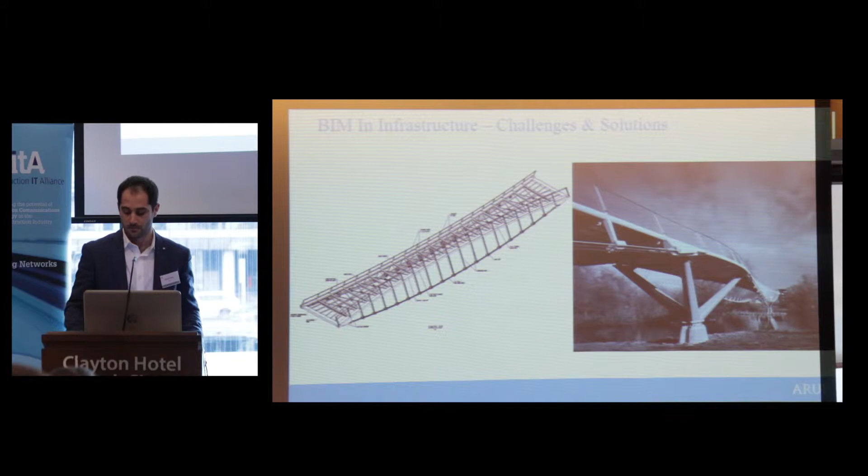We have our silos, and I think it's important that we understand that these have to come down, because otherwise it just does not work. So therein lies the challenge. We really have been modelling 3D since the 80s, so you could say, in some shape or form, we've been doing BIM since the 80s. But it's important to note that BIM is not just a 3D model.

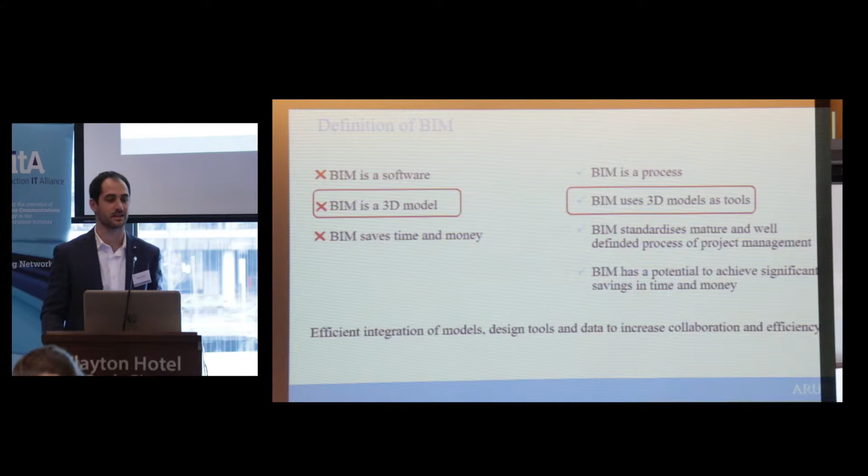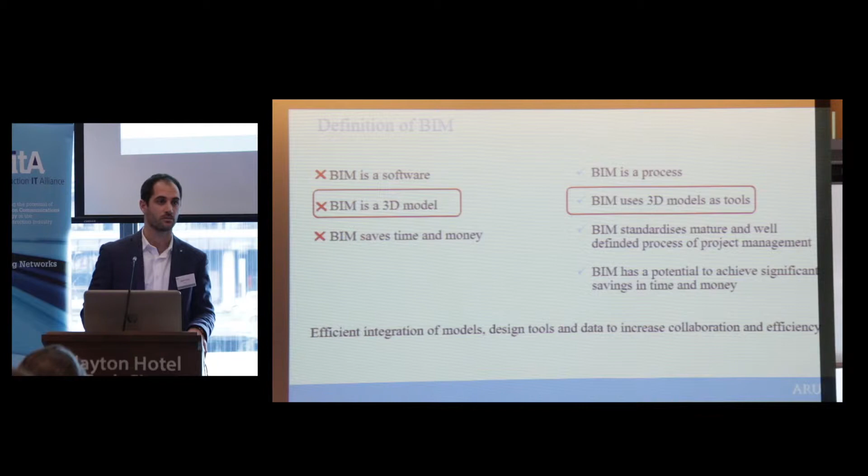Ted and Alan said it, that it really is using 3D models as a suite of tools to increase collaboration. And we like to see it as basically the efficient integration of models and design tools to increase collaboration and efficiencies, and that's key. We don't want to be stuck in our silos as a rail engineer producing a 3D model that is no good to anyone but myself.

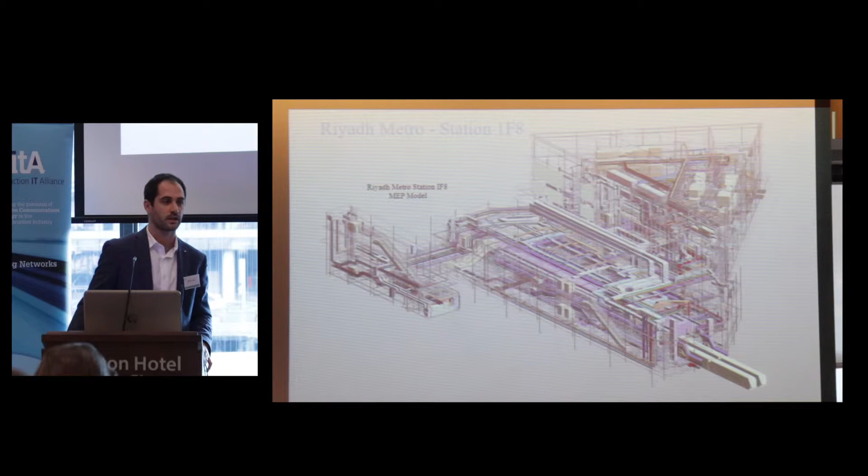In the world of buildings, in recent years, building engineering has really taken a giant leap forward, and it really has become the status quo. In Europe, every buildings engineering project is BIM proficient. Every project has to adopt BIM. Whereas when you look at infrastructure, it's years behind, and we are trying to ask ourselves, why is that?

The image you see here is a model. I'm going to present a few projects. A lot of them are international, but they're all done across the river. So this is Riyadh Metro Station IF8, which was done out of our Cork office: the structures, mechanical, electrical, public health, with the architecture being done in Toronto.

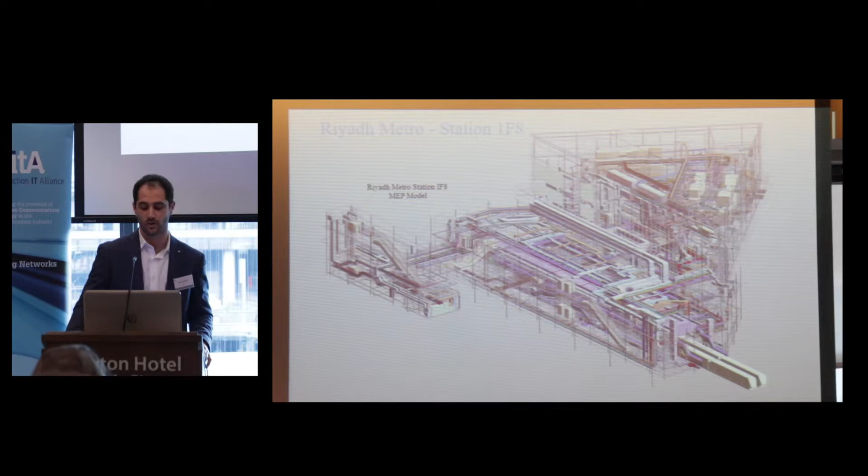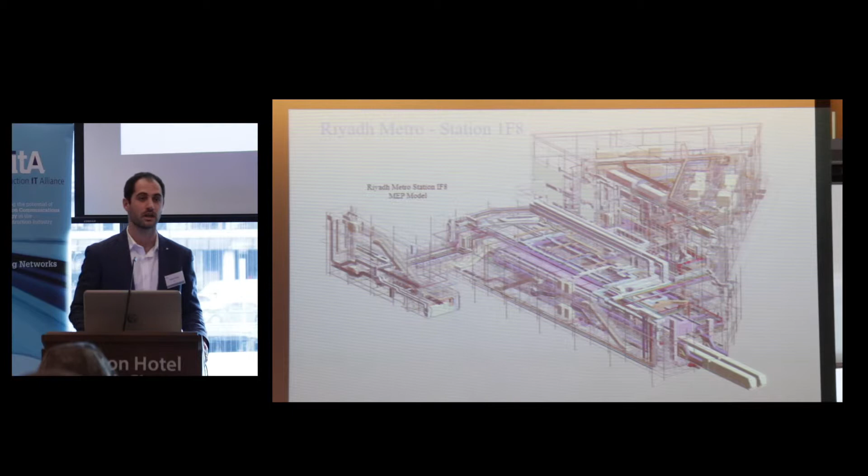It's incredible to think that we could work on a live model 24 hours a day and produce a model, as you see on the screen, that's fully clash detected, ready to package up and send to site. So you want to ask what's the benefit in it for the client. There you are. You get to site after your laborious design stage, and everyone has collaborated along the way, and everybody can see what each other is doing in real and live format.

So the challenges for us: if you take a building project, the complexity in building engineering is really the sheer number of elements, and it's trying to collaborate that number of elements between your structural engineer, your architect, your electrical engineer, your QS. But if you look at infrastructure, and in particular linear infrastructure, the complexity is not really in the sheer number of elements, but rather the complexity of the elements themselves.

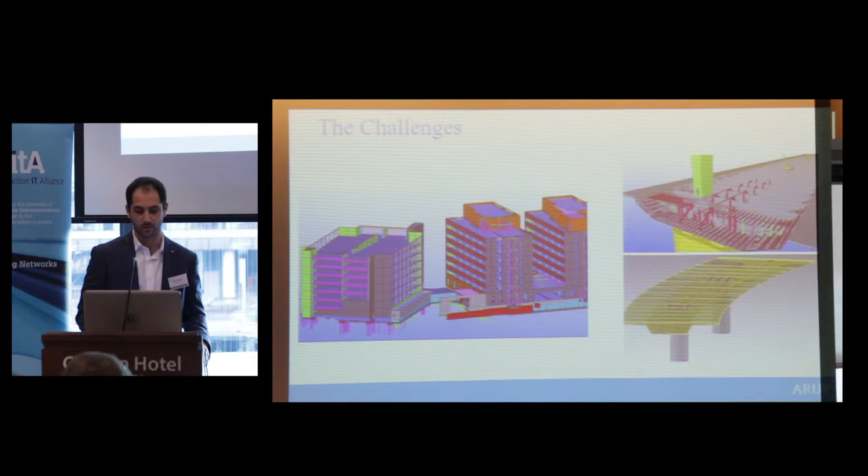So if you think of a rail alignment, you take super elevation on a highway, you take a rail alignment, you look at a clothoid curvature as the rail goes around a bend, varying radius curves. How the hell do we model that? And that's something we've had huge trouble with in the last number of years. So that's one of the challenges.

The other challenge is, as Alan said, the silos. We have an infrastructure group of 120 people, and we have huge silos. Rail engineers will only speak to each other, highways engineers the same. So we have to really break down those silos and get rid of the historic use of specialist software. Because the reality of it is, for BIM to work, you have to think of the end game, what's the output at the end.

The other one is the interoperability that Ted mentioned. Not all softwares will handle different geometries. We need to be ambidextrous, and we need to use different softwares for different tasks. As I said, with the problem with handling the geometry, for infrastructure, tools maturity isn't quite what we would like at the moment, but we're getting on.

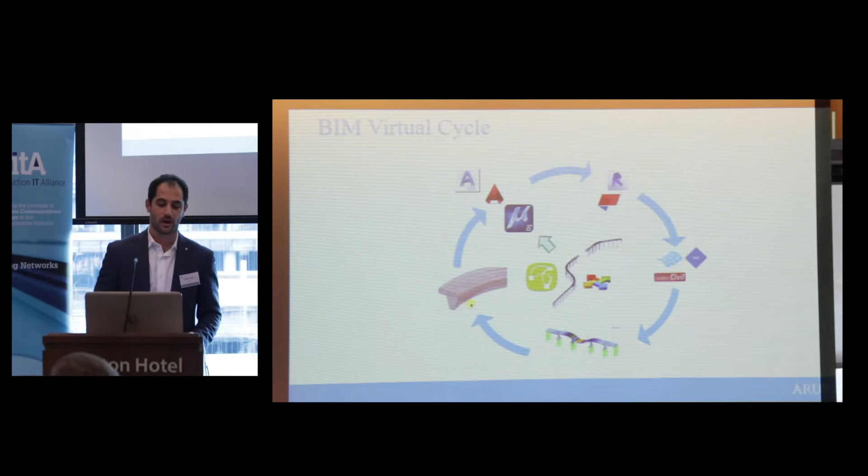So the challenge is to get that virtual cycle without having to recreate things, and we're not quite there yet, but we feel we're making a good handle of it, and I'll explain a little how. There's a software,

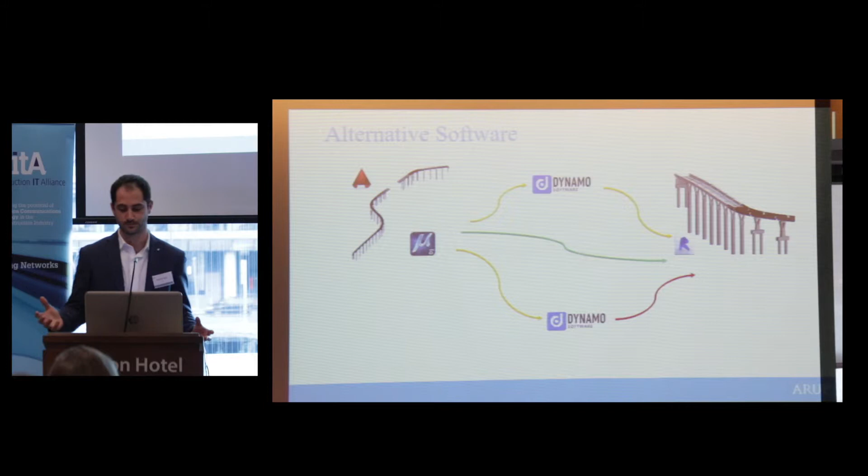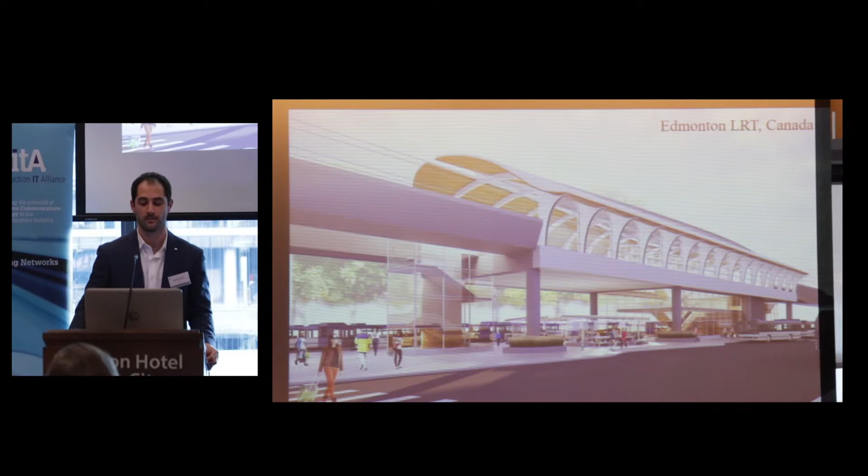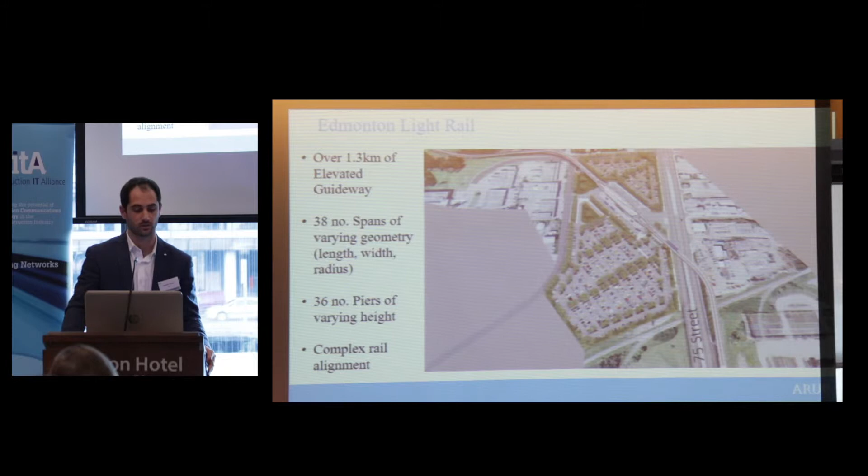An example of where we tried to use that with very little success, but have learnt a lot of lessons, is a project in Canada. So this is Edmonton LRT. It's a 13-kilometre railway viaduct. 1.3 kilometres of this was designed here in Cork, with the station in the middle. There were 38 spans of varying length geometry, and because it's a rail viaduct, we have complex alignment with clothoid curvature. So the way we tackled it is we took a look at the functional cross section.

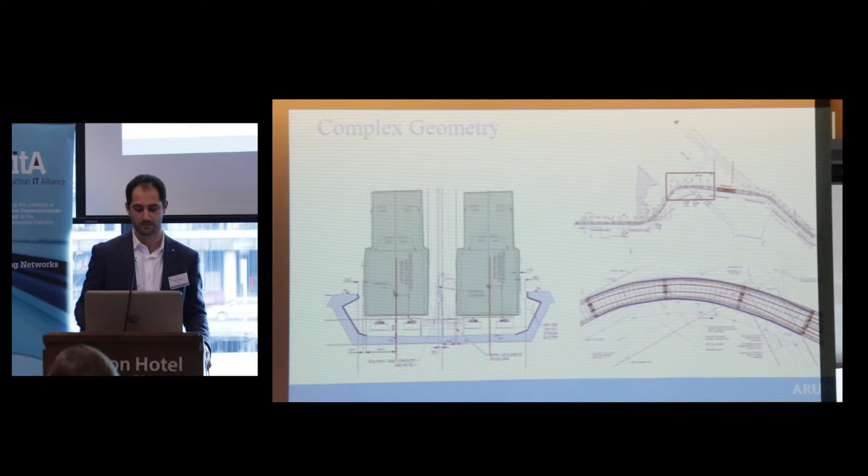Because you have varying radius curves, we could have rationalised the curves and made the viaduct or the girder a lot bigger than it needed to be, and just said, okay, contractor, you can build it to a constant curve, and once it's outside of our rail envelope, all is good. But we had huge problems with corridors, we had right-of-way issues, and also we wanted to increase the repetition between spans.

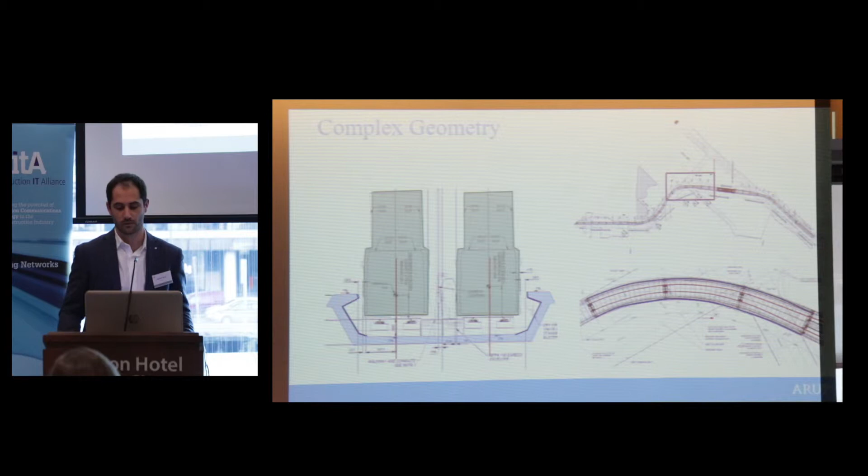So we looked at what package could we use. Revit was the choice because it was being used right across the project with the station design, with the tunnelling. So we were kind of stuck with Revit, so we had to look at a workflow that would allow us to produce our final 3D model. How we get there was the big challenge.

So the way we set it up was we were able to take the actual alignment file as a set of control points out and into Excel, and using these we imported them into Civil 3D, and we were able to develop a rail envelope, and using the composer within Civil 3D, we were able to model an assembly, which is effectively just the girder geometry, and sweep it through the swept path of the rail corridor to come up with a solid object. That solid object then was transferred into Revit, and as Revit users will know, in there we could model all the piers, the pile caps, piles, using Revit families.

Now the crux here is that solid object had no smarts. It came from Civil 3D as a solid. If we wanted to manipulate it, we had to go back to the start. So we were really doing things twice. If we ever had a change in the rail alignment, if we wanted to thicken the webs or thicken the bottom slab or whatever, we had to go back and do it again.

So it wasn't ideal, and we struggled on. Program meant that we had to deliver. We were a design and build contractor with a contractor breathing down our back.

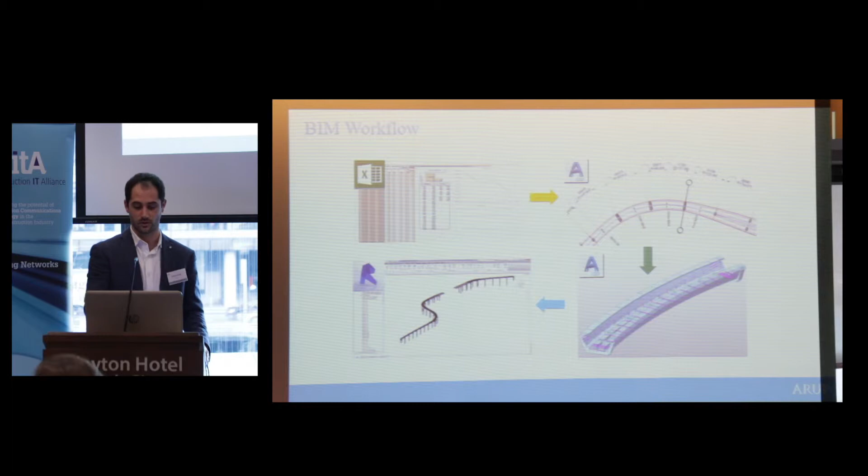So this just gives you a basic summary of the workflow. But what we've been looking at the moment with Metro North is the same workflow, but sticking Dynamo in the middle. So we do the same thing. We get the rail alignment as a set of control points into Civil 3D. We set up the alignment in Civil 3D, and then using Dynamo we can control the variables.

So you set up, using assemblies again, same thing, we set up a variable dimension. Rather than giving it a fixed dimension, we set up a variable, and in Dynamo we can actually set up our spaghetti, as a lot of people call it, but what it is, is a set of commands that tell you, I want you to do A when B occurs. It's really programming, but there's huge smarts behind it.

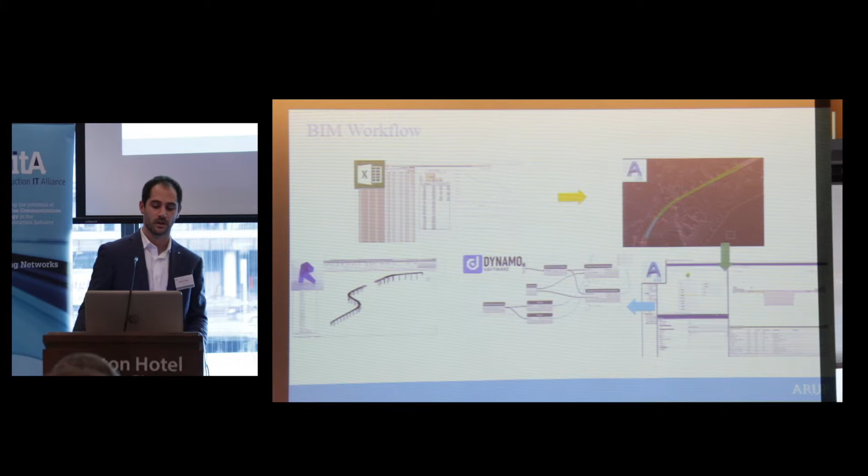And what it means then is now we have a Revit model that's fully parametric, with any changes that needed to be made, they could be made within the alignment, within Dynamo, but all the time your Revit model, and in the end your 2D drawing files which come from your Revit model, are parametric with the alignment. So we found there was great benefits in that.

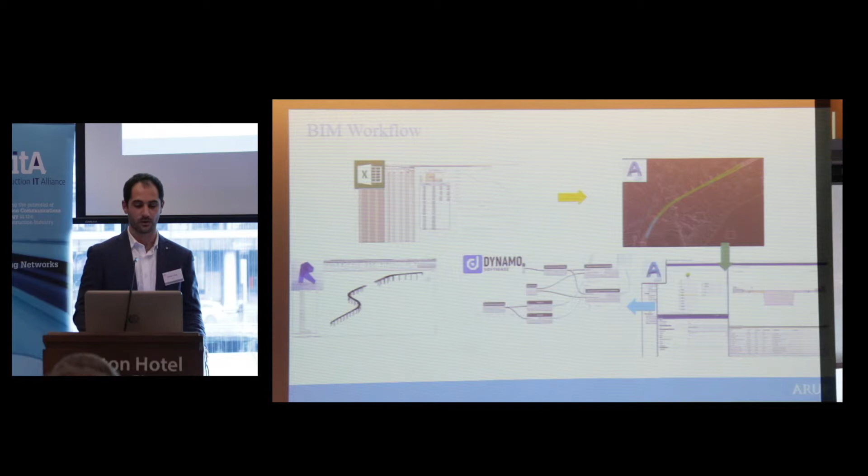I suppose just going back to the benefits for the contractors or for the end users, I mean, when you design in 3D, it gives you a huge understanding of the process. It gives your design teams understanding of how things are put together. It gives the contractor the ability to critique your design as it progresses.

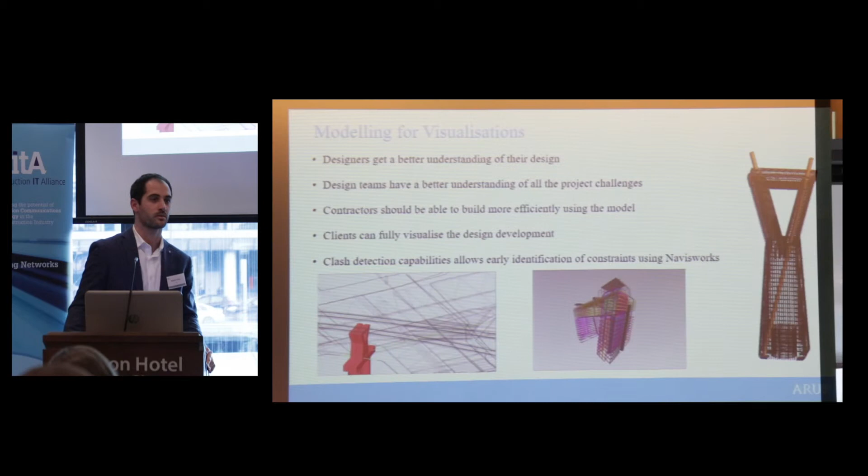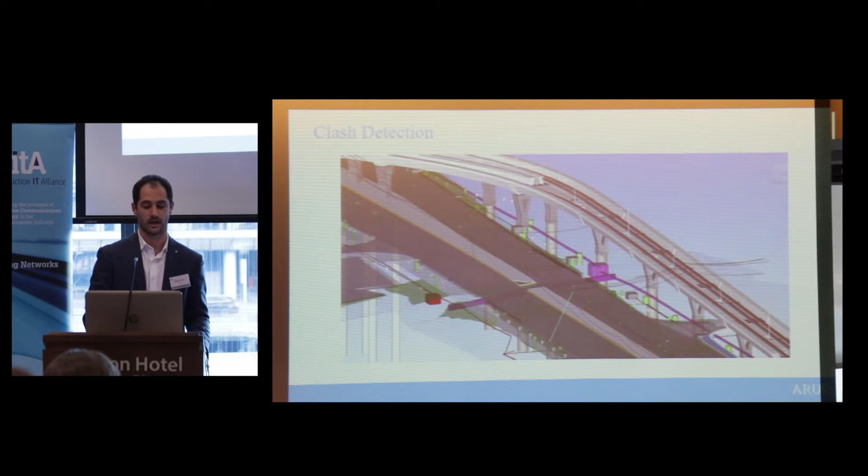So the thing is that you're doing all of this up front, so there's huge benefit to the contractor. This is just a Navisworks clash detection model, which shows how we were able to do a virtual design review on a weekly basis. We were able to import all of the utilities models in with the structures model, and you were able to do a real-time virtual design review.

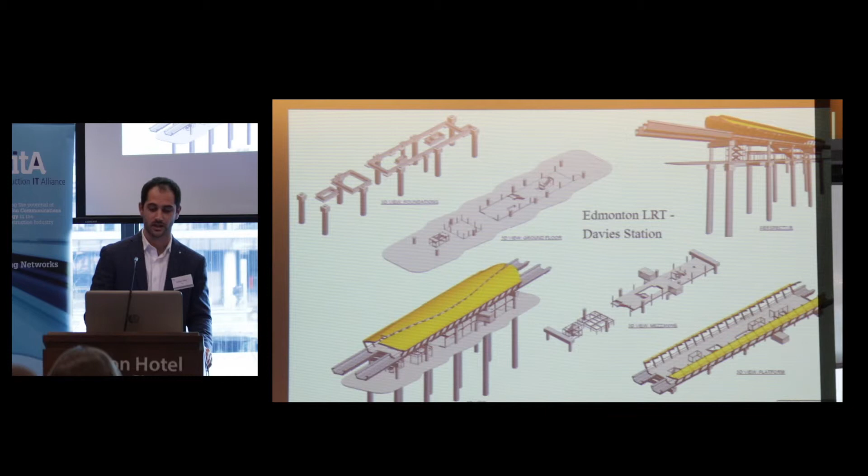These are just images really of the station. The station architecture and SMEP were designed from the same live model. And I suppose the last one, I just want to show a quick video which shows a very quick 15-minute production, just showing the driver's perspective as you run along the alignment.

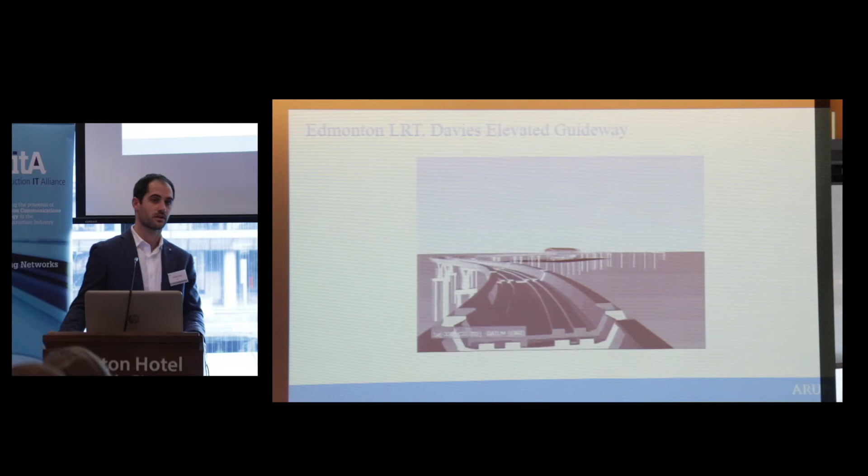I suppose as it's flicking through that, I just want to say that this is a detailed design project that required the output to be detailed design to construction level of detail. So we had to tackle that in a certain way.

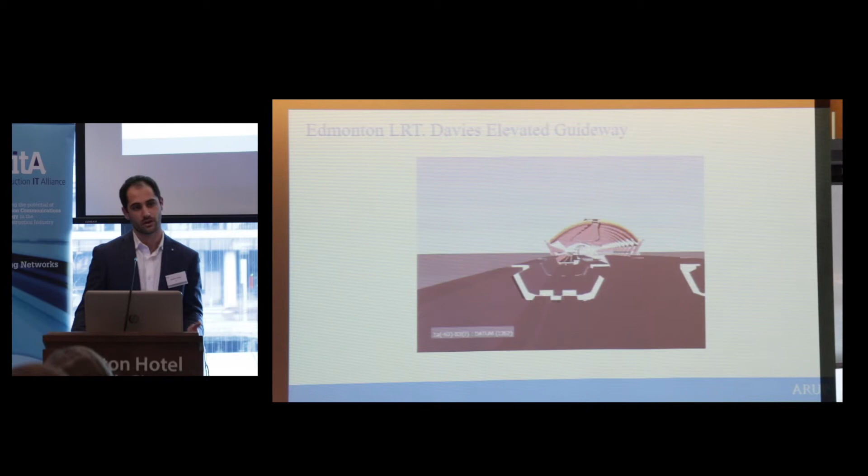We needed certain software to deliver the objectives that our client wanted.

The next project is the N6 Galway Outer Ring Road. That's at concept stage, going for public procurement and public consultation, so we had to take a different approach. Our drivers were: how do we get optimum alignments, how do we do multiple alignments, how do we do visual fly-throughs, how do we engage the public and engage the client. We don't care about the level of detail, whether we're going to do rebar, or whether it's down to the nearest millimetre.

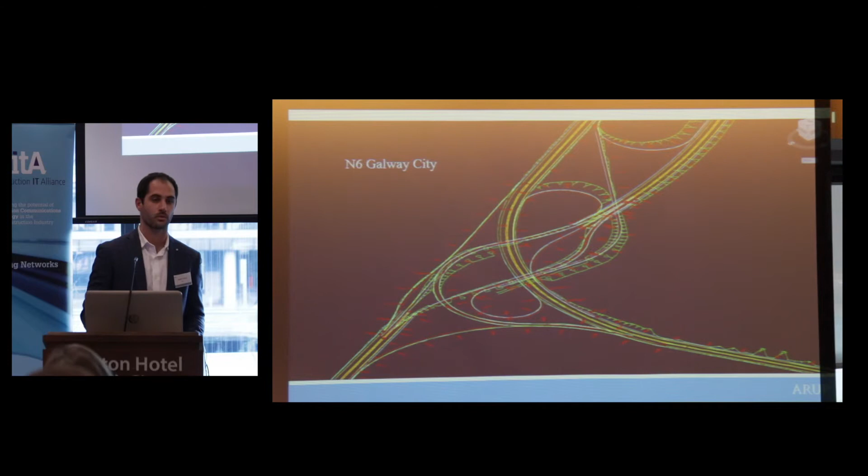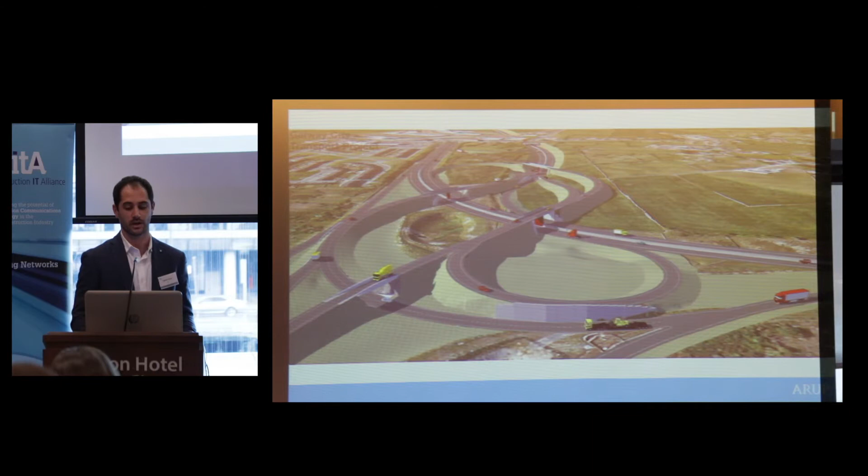Our issue here was that we had to do this fast and with a lot of visual impact. So here you can see a junction - this is InfraWorks taking an MXROAD road alignment and bringing it into InfraWorks. Very visually impactful, and this allowed us to create visual fly-throughs so the client could see what was being planned.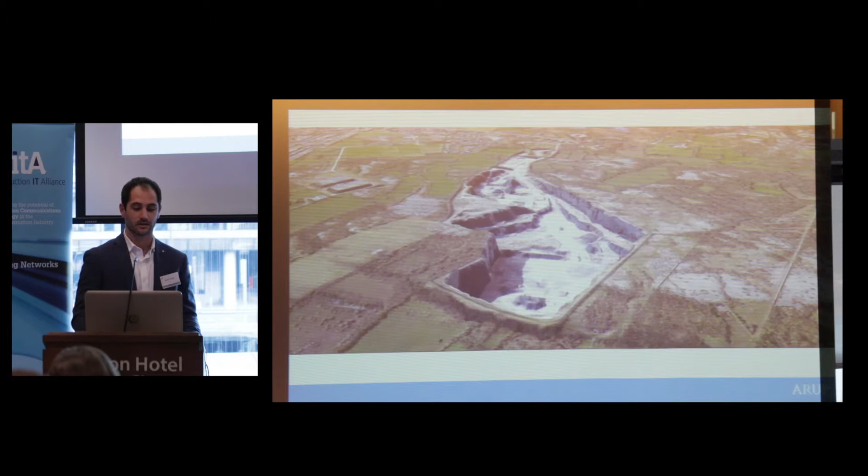Again, this is a LiDAR survey of an existing quarry. You add the detail, add the GIS mapping, then bring it into InfraWorks, add the road layout, and again, very quickly, in a couple of weeks, we're able to produce something visually impactful that allows us to bring the client and the public along with us.

We talk about different levels of BIM, and I suppose the Edmonton project was probably level 2. This next project I'm not directly involved with, but it's our colleagues in Amsterdam, and I wanted to include it because this is where I think we need to get to - this is probably level 4.

This is the Suurhoffe Brugge in the Netherlands. On the left-hand side is an existing rail viaduct adjacent to an existing highway viaduct. The issue was that vibrations from the rail were causing fatigue issues in the bridge. So the decision was to construct a new steel arch bridge and move all the road traffic off the bridge, then do the fatigue repairs to the rail bridge, and reopen the road bridge once repairs were done.

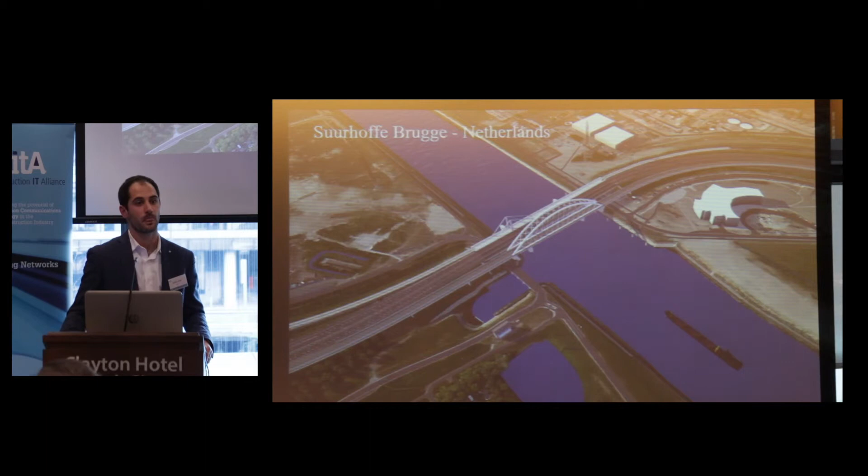This was a multidisciplinary approach: Arup were doing the structural design, Royal Haskoning were doing the highways alignment, and the client very bravely decided, 'I don't want 2D drawings, I want a full 3D model. That is my deliverable. I wanted 4D with construction sequencing, 5D with costing, every element modelled, and the existing bridge modelled to the same level of detail as the new bridge.' And there is the vision that we probably lack a little bit.

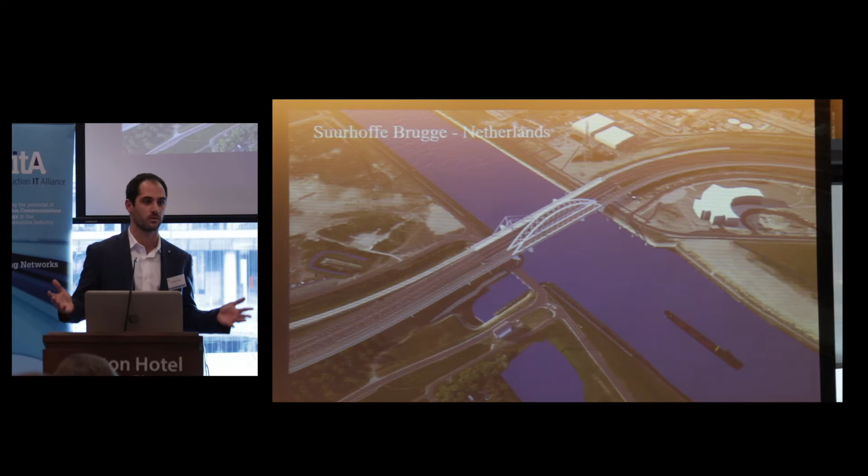It costs, but it is the future. It's something that has to be seen to be believed, I believe. I think clients have to really touch and feel this, construct them and see the benefits before they'll actually make the investment. But this is why we're all here - we're trying to push the agenda and make people realise that this is what the future is.

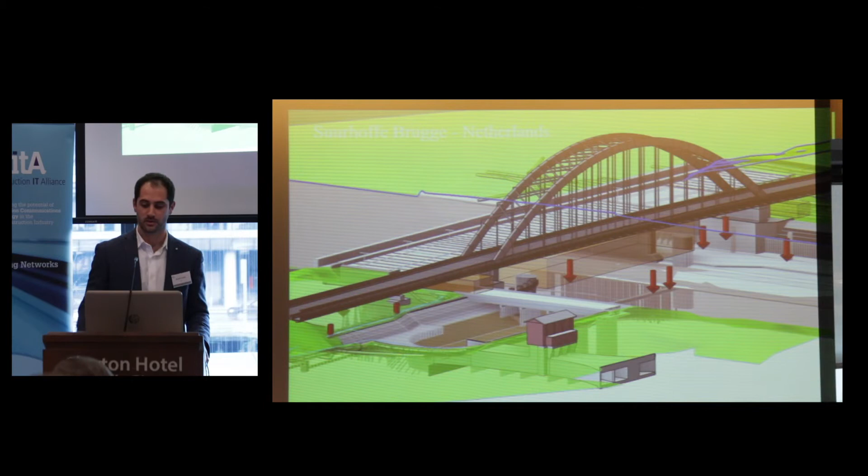So that's the Navisworks model. A little closer to home then is Harley's Street Bridge, which is just behind us here, going for construction in the summer.

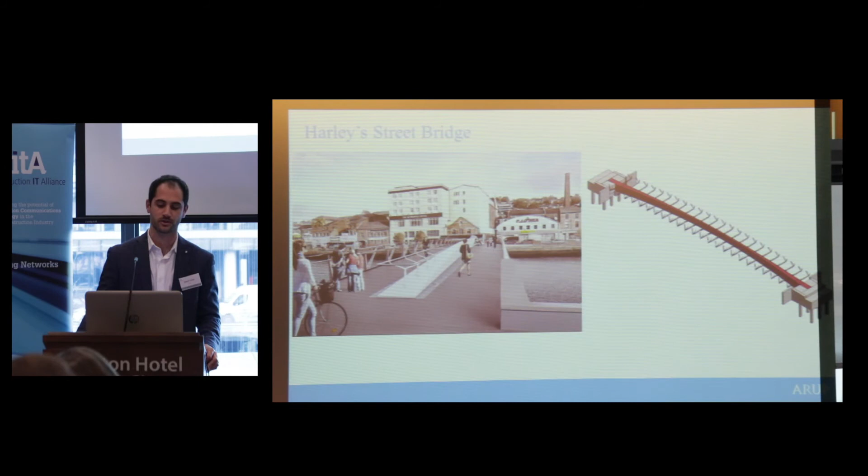This is probably where we lacked a bit of collaboration. Our architects wouldn't share their Grasshopper models, so we had to create a Dynamo script to directly compare with theirs, because the actual geometry of this bridge was quite complex - it was formed with three-dimensional curves cut from an inclined cylinder. We had to make sure we met the architectural vision, producing a script by guessing at theirs, setting up parameters we didn't really know would work. But if we had to draw this in 2D, we'd still be drawing it.

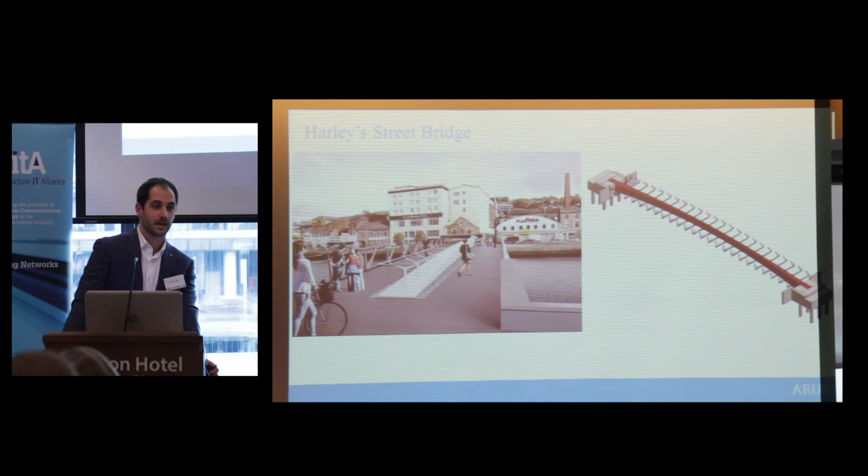The reality is we could play with the scripting in Dynamo, test it, prod it, send Revit models back to the architect and get them to tell us yes or no, whether we were in line with what they had. And now what we have is a 3D model that can be used further.

There's potential for the fabricator to use the model, and potential for us to do fly-throughs and that kind of automation. But the essence of this is, if we had to draw this 10 years ago, we'd still be drawing. The reality is we were able to create something parametric, and push and prod it and test it until we got what we felt was the right solution.

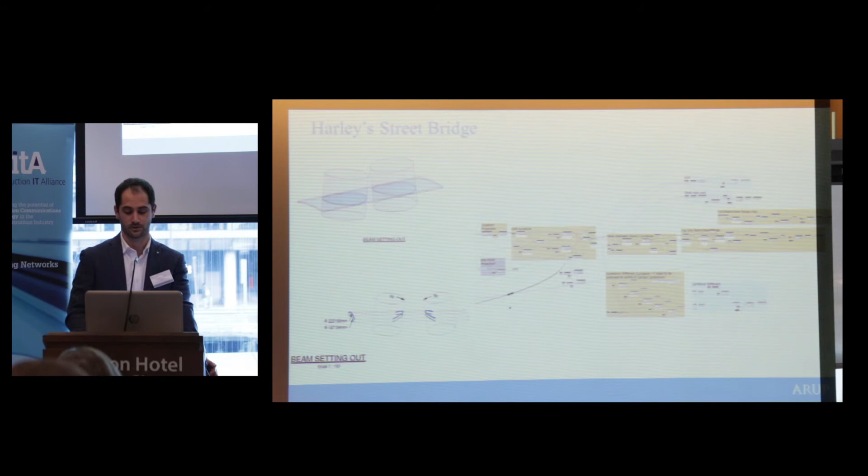Ted mentioned the Cork flood relief work - a very contentious project at the moment. I'll throw on the video and skip along a little. So, in collaboration with the OPW, this is the Morrison Island package, and the vision here is that we're going to have a new city centre environment incorporating the flood relief works and a high-end public realm.

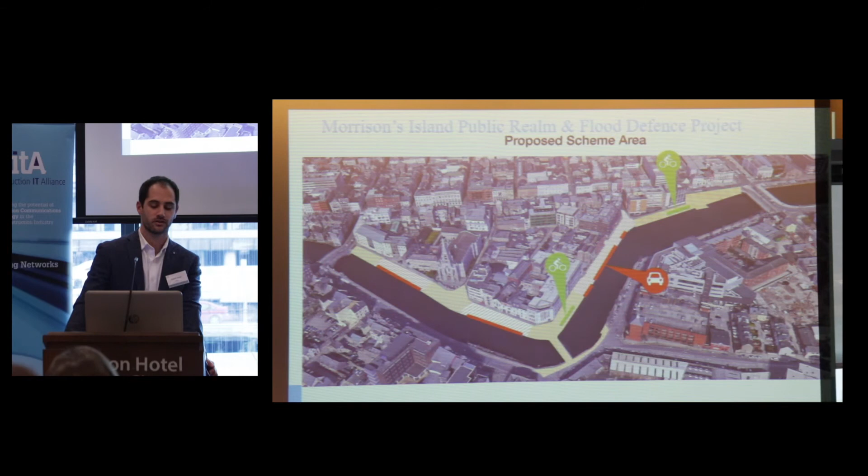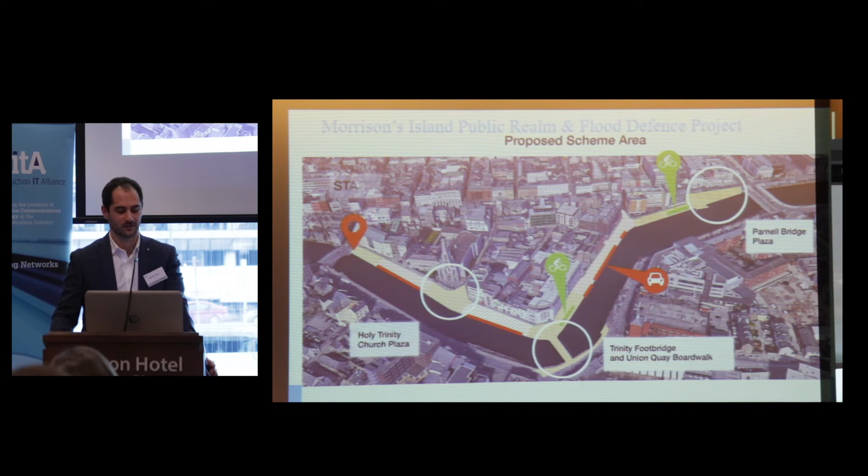The reason we invested in this level of detail was that we felt it would serve the public better if they saw it in real time, if they saw fly-throughs. But in fact, where it actually caught us out was that the client himself didn't really have the vision and wanted to see it, and as the fly-throughs were being produced, the design started to rapidly change.

So what was a set of 2D drawings became a set of visual fly-throughs, but what it also meant is that the client really got to touch and feel it and figure out what they wanted, and then it took on a life of its own.

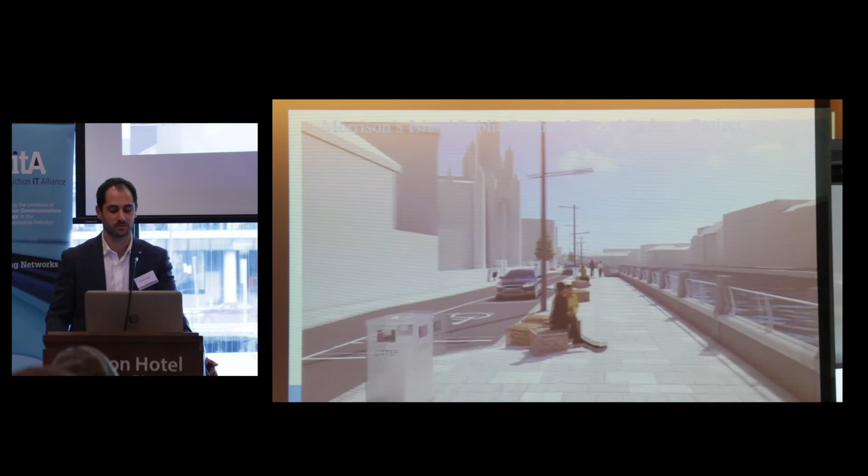So I'm showing it because it shows the power of what can be achieved. This is a set of 2D drawings that were converted into Civil 3D. It was LiDAR sketches, or LiDAR surveys, and then all of that was brought into Civil 3D, and then we were able to use 3ds Max to create the animations.

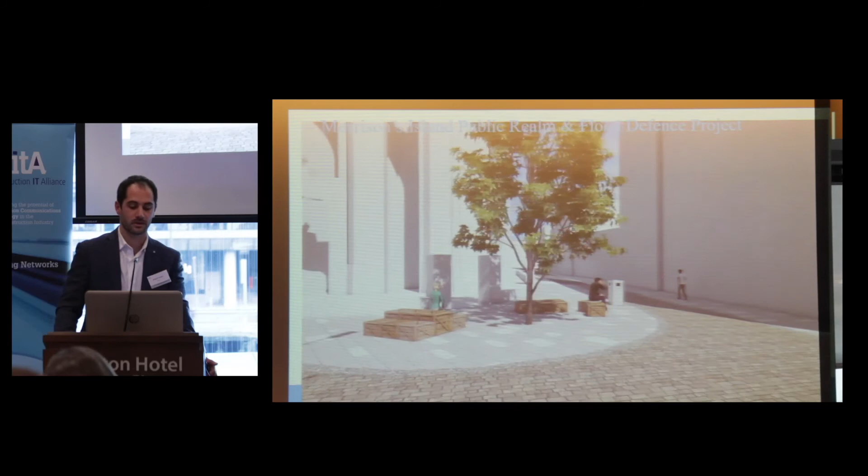So again, if we were to show a set of 2D drawings to the public, would they really buy it? I'm not so sure, but we're trying. So that just gives an example of what can be achieved in a very short space of time.

So where are we now? We've made significant strides in 3D modelling. BIM is not 3D modelling, I know, but as Ted said, we have to go through that process before we can bring it to the next level. And we feel that we're getting there.

Infrastructure, as I said, is probably a few years behind buildings, but we feel that if we can break down the silos and think outside the box, we can catch up quite quickly. And the benefits to infrastructure projects of BIM far outweigh, I would imagine, the benefits to building projects, because of the sheer scale and cost.

We've developed robust workflows that we've tried to break down the silos and integrate the specialist disciplines. We've used things like Grasshopper and Dynamo to help us define the geometry, to get over issues we have with software, because as Ted said, Revit sometimes can't model curvature like we would want, but we've figured out there are options to get around that.

Staff training - we have to be ambidextrous. The day of somebody coming in and saying 'I'm a specialist in Revit' is gone. You have to be proficient in multiple softwares and willing to use all of them, because the reality is you have to look at the bigger picture, and every BIM deliverable will require multiple software.